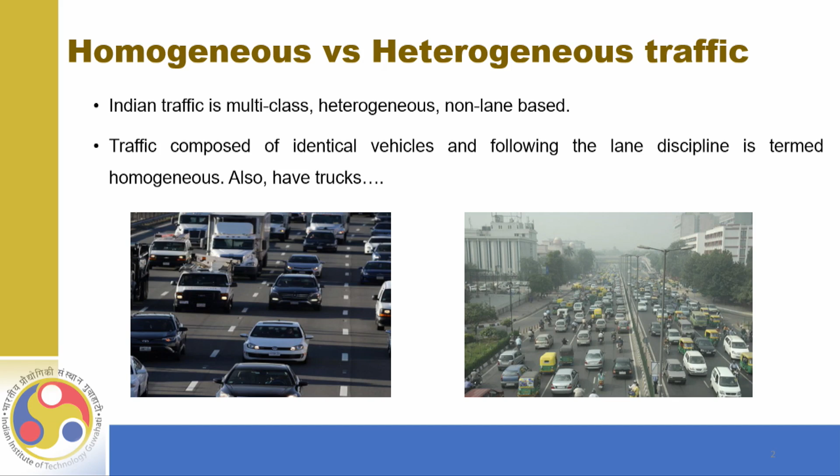Along with that, the capability of vehicles is different. Some vehicles can travel at maybe 100 kilometers per hour, while at the same time we have three-wheelers and other vehicles which move at 40 or 50. Nowadays electric e-rickshaws are also there, sharing the same space. So speeds are different along with different maneuverability.

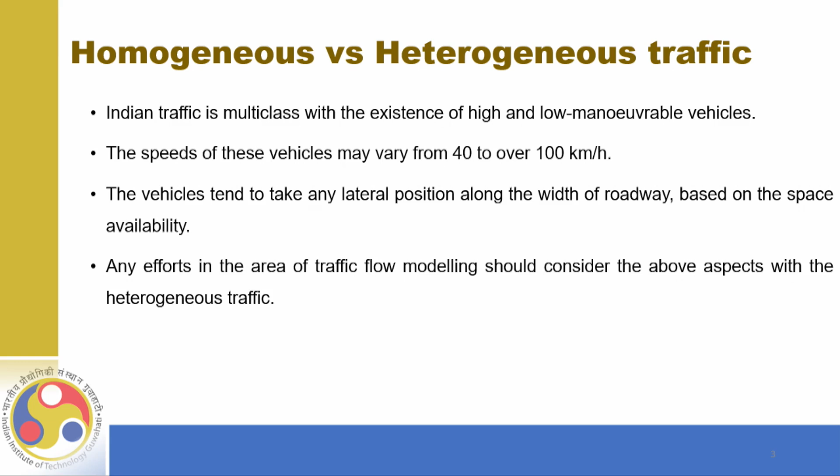We have two-wheelers which can basically weave through whatever available spaces are there, passing through those spaces, and the vehicles are not maintaining any lane discipline. Whatever space is available, that tries to be occupied by the vehicle. So if we are able to model the traffic for this condition, we need to have this aspect in our mind.

As discussed in our previous lecture, the parameters we measure are speed, flow and density. Out of these three parameters, flow and speed are direct measurements - we can easily measure them from the field. However, density is usually measured from the fundamental relationship, that is Q equal to K times V.

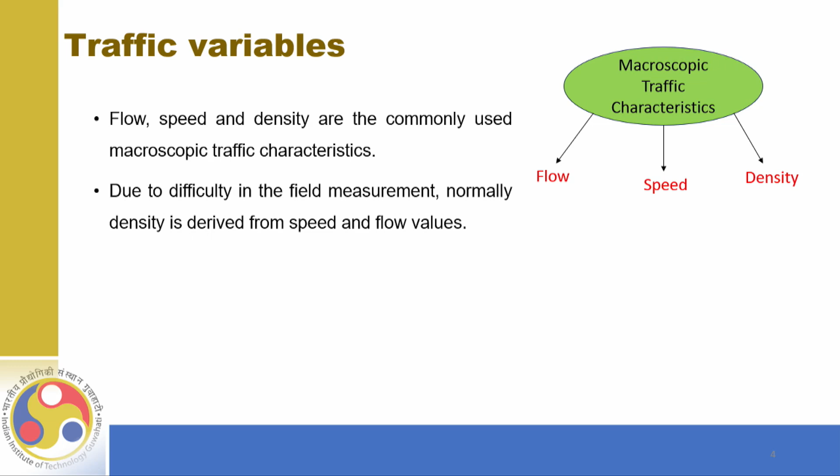Density is usually expressed as the number of vehicles existing per, in developed countries where lane discipline is maintained, vehicles per kilometer per lane. But if we are considering Indian conditions, we are not maintaining the number of lanes - lane discipline is not there.

In that condition, what we can do is measure it in terms of the number of vehicles that exist per kilometer per direction. So rather than considering density per lane, we consider it direction-wise. For a direction, we calculate the number of vehicles that exist, and express how many vehicles exist per kilometer.

Although it solves one issue by considering lane discipline, there are some other issues also there - it is not considering the dimensions of different vehicles. Here in India, we have very small two-wheelers, along with large vehicles like trucks sharing the same space. So although the directional measure resolves the issue of non-discipline nature, we are not actually accounting for the different sizes of vehicles.

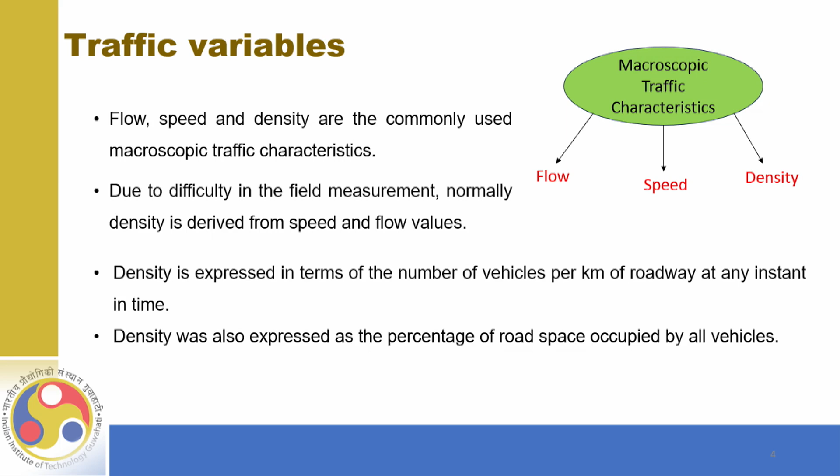Along with that, different vehicles can maintain different speeds. We cannot expect that three-wheelers will go in the same manner as a car or a truck can go. So the speed difference among different classes of vehicles, along with size, is not considered in this manner.

So to resolve this, there is a need of understanding this traffic density or concentration by some other means. For that, one concept is occupancy. By definition, occupancy is the proportion of time during which a single point of roadway space is covered by vehicles.

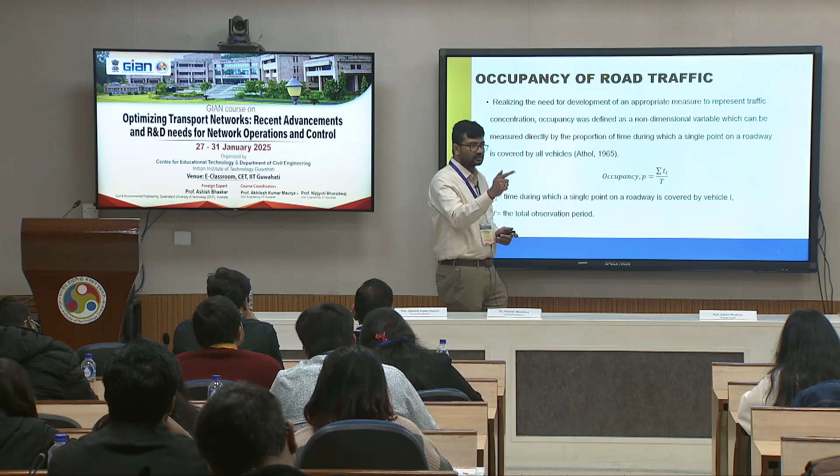If you look into the equation, occupancy along the line - that means in the cross section of road - is measured as the summation of Ti, that is the time for which all vehicles occupy that particular line, divided by capital T, that is the observation period. This observation period might be 5 minutes or 15 minutes depending upon our study.

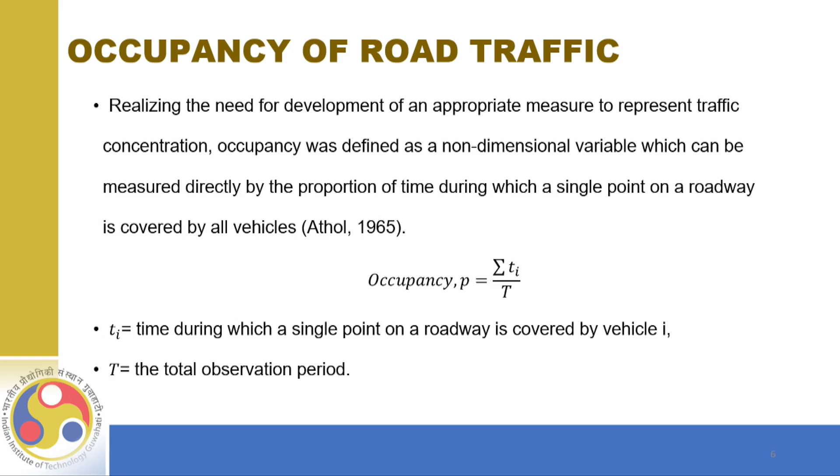Small t is the accumulation - let's say we have observed 10 vehicles, then those 10 vehicles occupied that particular segment for a certain time period. That time period can be observed as the summation of small t. Now with area occupancy, out of this, we have two issues - one with speed and one with size.

Speed is definitely taken care of by this occupancy, because if the vehicles are slower in nature, it will occupy for more time. If it is a faster vehicle, it will occupy that particular space for a lesser duration. So occupancy is actually considering the speed of the nature.

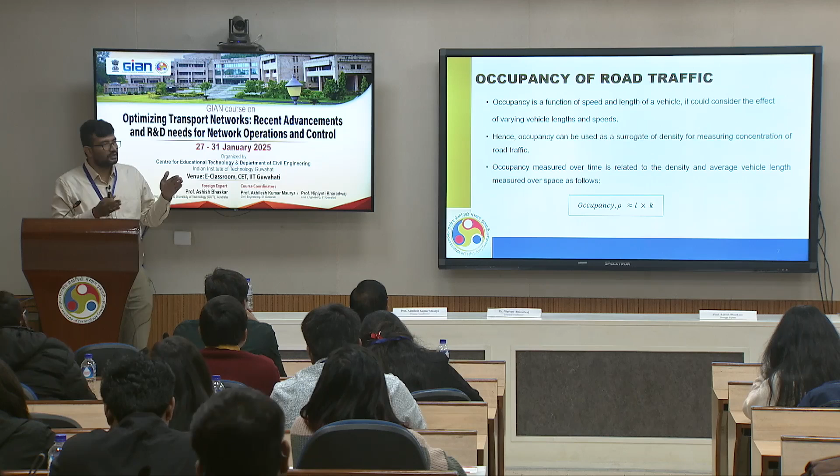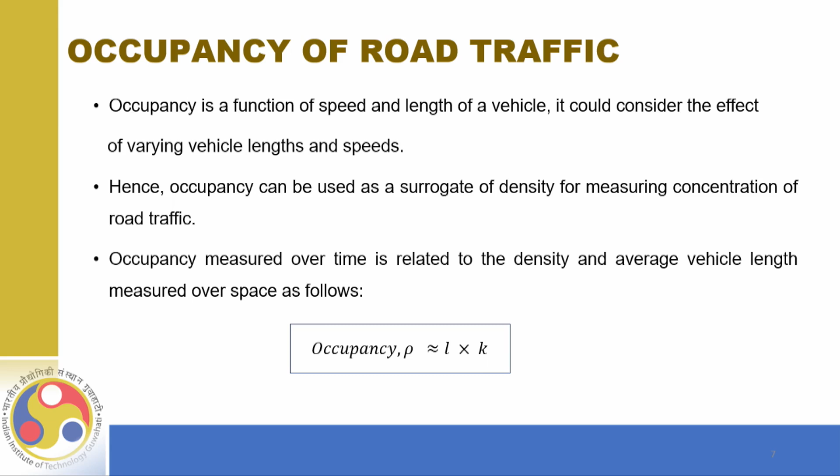However, along with the speed, in Indian context vehicle sizes are also different. A slower vehicle with larger size moving, and a small vehicle with slower speed moving, that is accounted for in this occupancy. So if we look into this occupancy, it is also having a relation with the density parameter. Occupancy is proportional to the average length of vehicle and the density.

Now, if we measure occupancy in real life, in practice it is difficult to measure the occupancy for a particular line, so rather we measure it for a small segment. Rather than measuring it on a line, we consider a small segment of 5 or 10 meters, and along that line we can consider it as a detection zone. In that detection zone, we measure it for a duration of time T, which might be 5 or 10 minutes, and in that duration we see how much time these vehicles take to navigate this 5 or 10 meter detection zone. That time comes as the summation of small Ti.

So now one thing is known: this occupancy, when measured for a small detection zone, also depends on the length of the detection. If the detection length is small, the occupancy value will be different, and for a longer detection zone the value will be different. So for the same road segment, the occupancy value might be different depending upon the length of the detection zone.

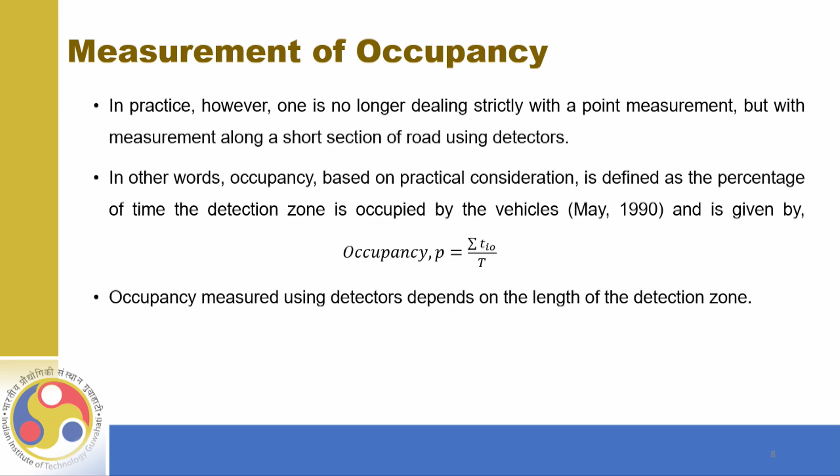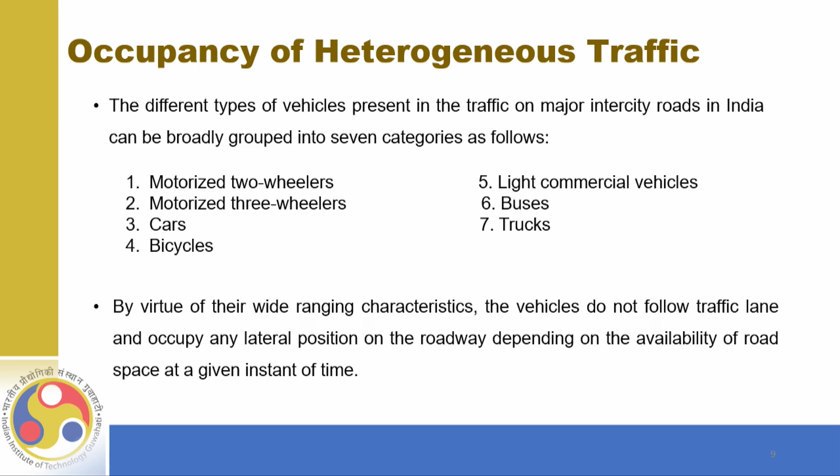Now for heterogeneous conditions, while measuring occupancy, we have around 7 different types of vehicles: motorized two-wheelers, motorized three-wheelers, cars, bicycles, light commercial vehicles like small pickup vans, and buses and trucks, all existing in the same roadway space. These vehicles have different static and dynamic characteristics, that is, their maneuverability is different and they can maintain different speeds, so all these aspects need to be considered while estimating the occupancy.

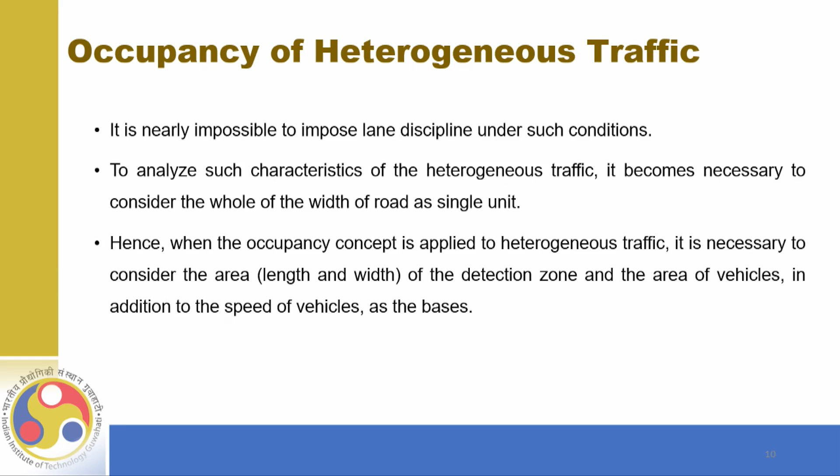To analyze such characteristics, it is necessary to consider the width of the road, and along with that, the length and width, that is the area of the vehicle, should also be incorporated. So if along with the travel time we also consider the area of the vehicle in the calculation, then all vehicles' dynamic characteristics, size, and speed will be incorporated in the estimation.

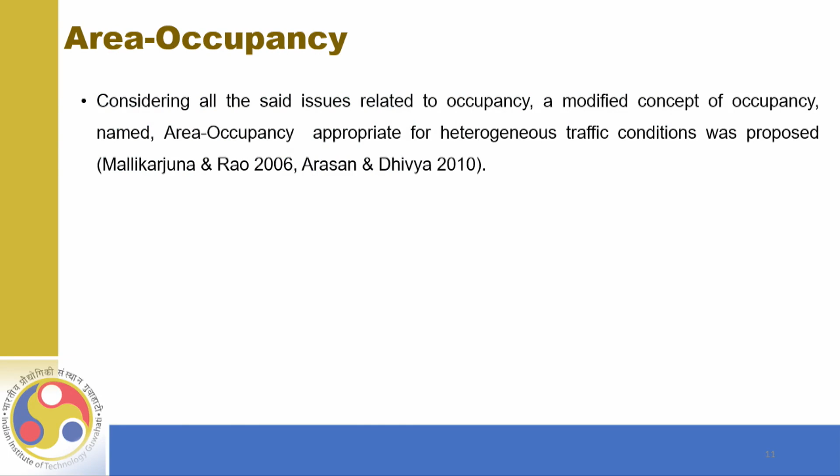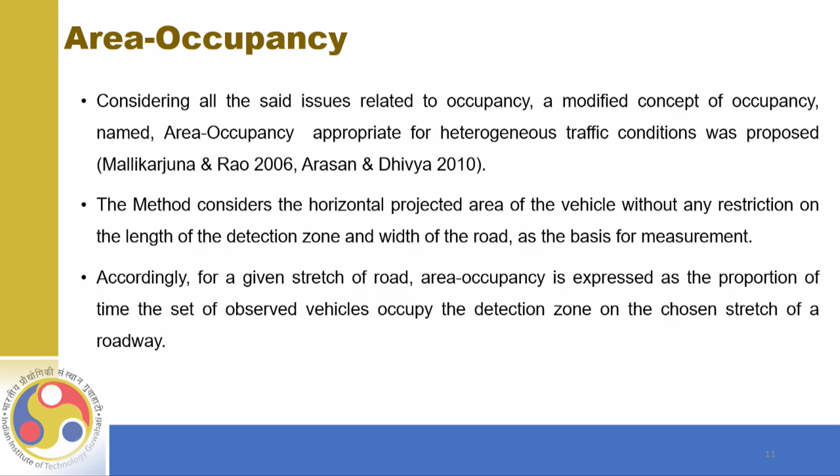For that, a slightly modified version of occupancy is proposed, called area occupancy. What area occupancy does is, along with the travel time of the vehicle, the horizontal projected area of the vehicle is also considered in the estimation. So for a given stretch of road, area occupancy is expressed as the proportion of time the set of observed vehicles occupy the detection zone for a chosen stretch of roadway.

Looking at the earlier definition, occupancy was the summation of Ti by capital T, that is the total observed time, and small Ti is the detection time occupied by the vehicle. Now if we introduce capital A, the area of the detection zone (length and width), along with the area of individual vehicles added into the occupancy, it becomes area occupancy. Along with the speed, it also characterizes the size of the vehicle, so small ai is the area of the vehicle being considered. If larger vehicles are there, the occupancy value will go up. So along with speed, the area is also considered in the calculation.

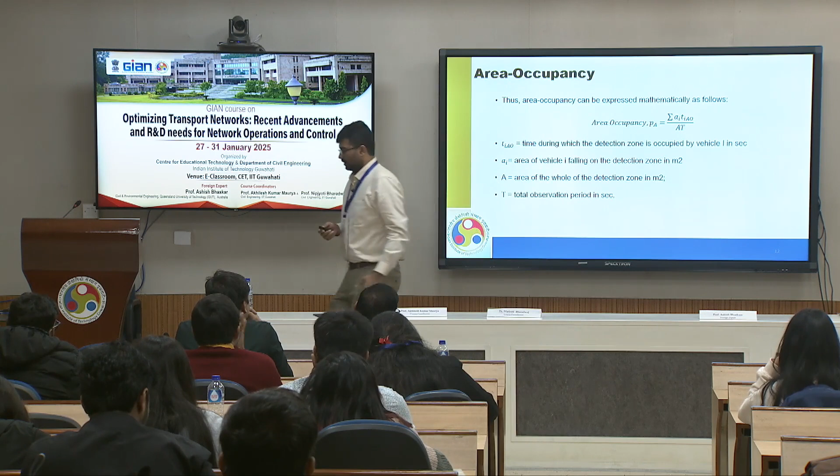Speed will be factored with small Ti, the time spent in the particular detection zone, say 5 or 10 meters. If the vehicles are moving faster, they will be there for lesser time. So speed is accounted for by that, and area is also accounted for here.

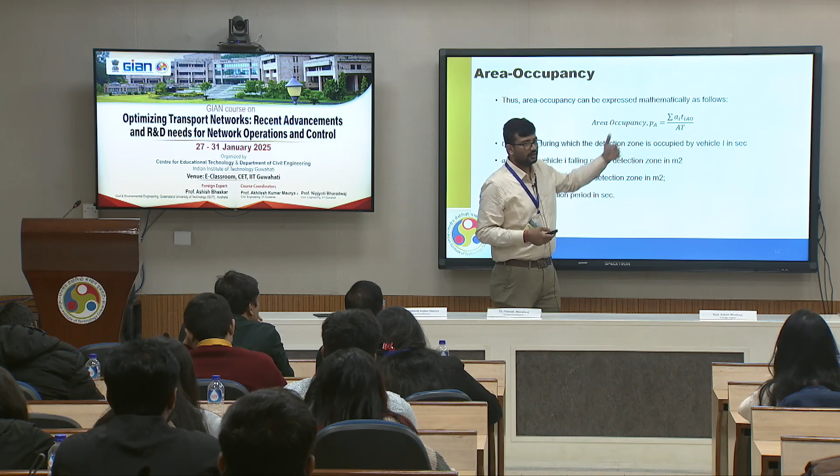Now, what are the advantages of using this concept? Area occupancy is not affected by the length of the detection zone. Earlier, the problem was that if the length of the detection zone is different, the occupancy value will be different. So that will be taken care of by this method.

The other advantage is the effect of heterogeneity and lane discipline is also incorporated here, as we are considering the entire width of the road. So it is an indicator of roadway traffic concentration for any flow level, because of its ability to accurately replicate the extent of use of the road. If it is used by different classes of vehicles, how different classes are using it is also incorporated here.

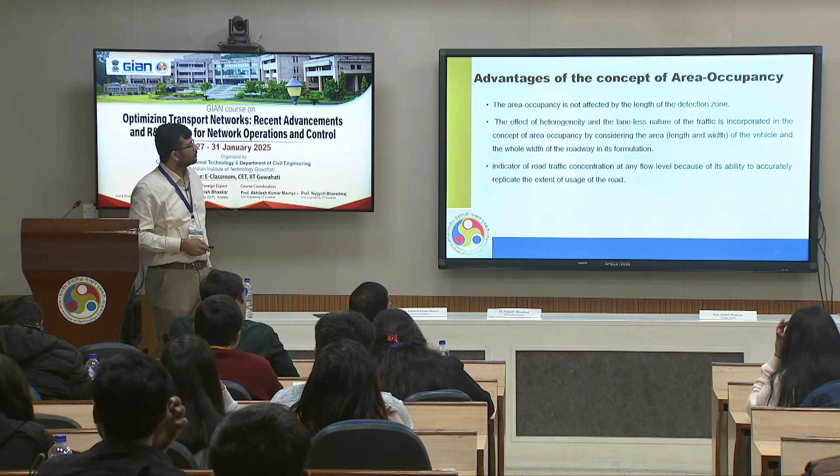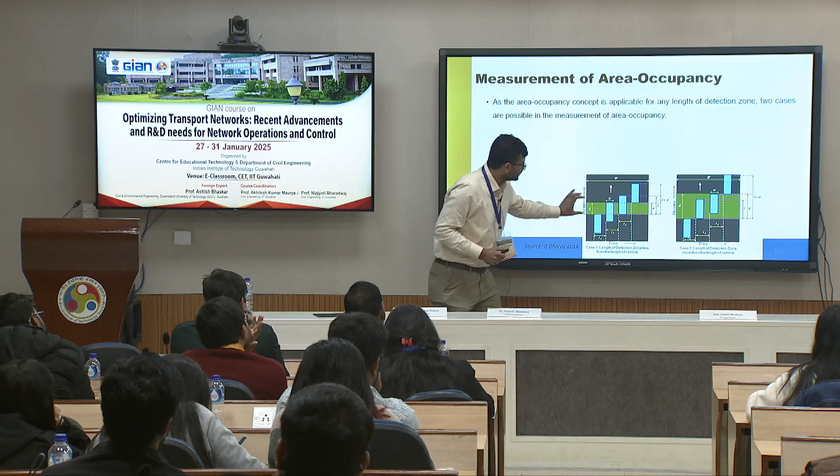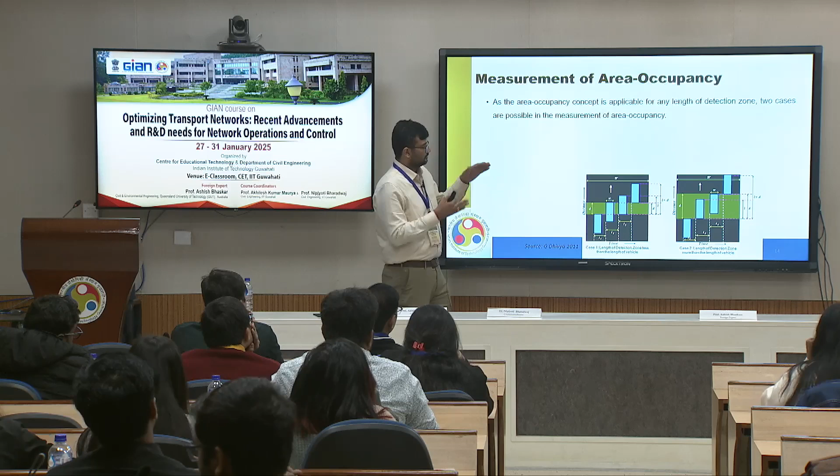Now we will go a little bit into how it is measured in the field. There are two cases. In measuring the area occupancy, the detection area is not a concern, so we consider two cases. The first case is when the detection length is less than the length of the vehicle. Case 2 is when the detection length is longer than the length of the vehicle.

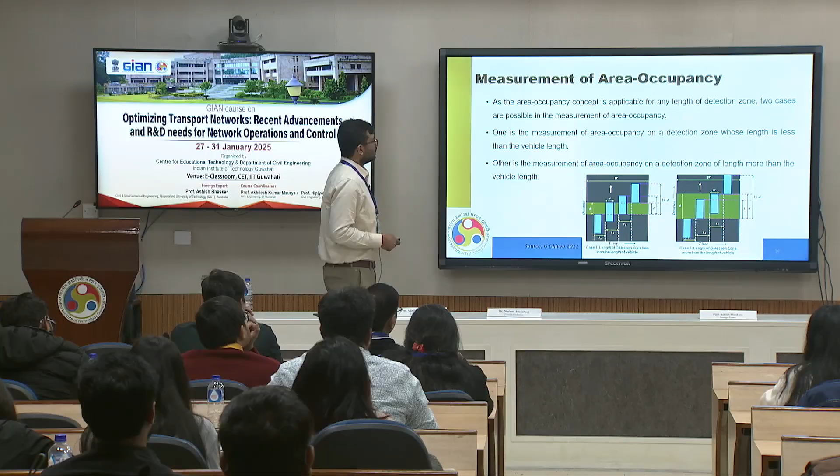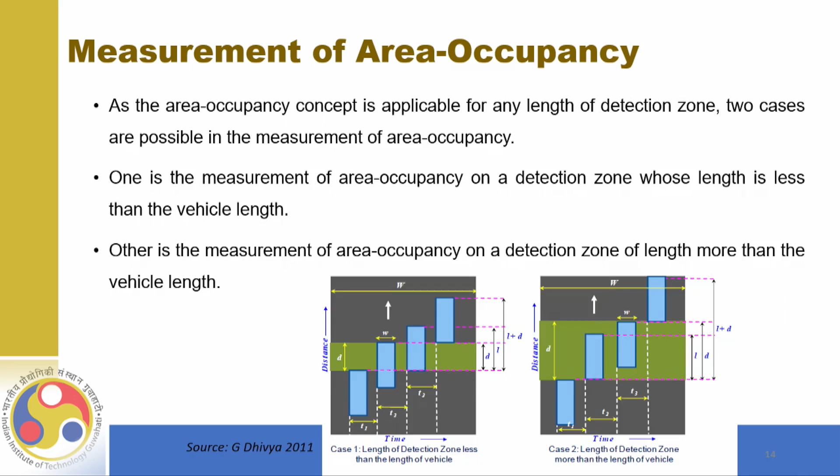Now, looking into the measurements, the time we discuss here can be divided into three components. The first component is the time taken for the projected area of the vehicle to fully cover the detection zone. In the first case, once the vehicle reaches the detection zone, time T1 is the time till this vehicle covers the detection zone. Here, the length of the detection zone is less than the vehicle length, so the vehicle is partially covering the zone.

Similarly, for case 2, during this T1 time, once the vehicle reaches the beginning of the detection zone, it fully enters into the detection zone. That is the T1 time component. The time T2 is the period after T1, during which the horizontal projected area of the vehicle on the detection zone remains unchanged, from the time it is fully covered until the vehicle's rear end reaches the beginning of the detection zone.

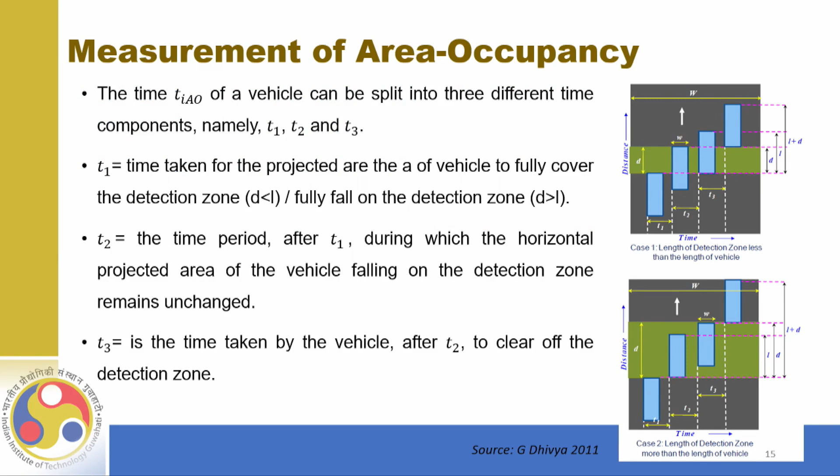So the area remains the same during this time period. Once the vehicle is fully covered, it moves towards the end of the detection zone, that is T2. Then T3 is the time taken by the vehicle after T2 to clear off from the detection zone. So these three time components can be observed.

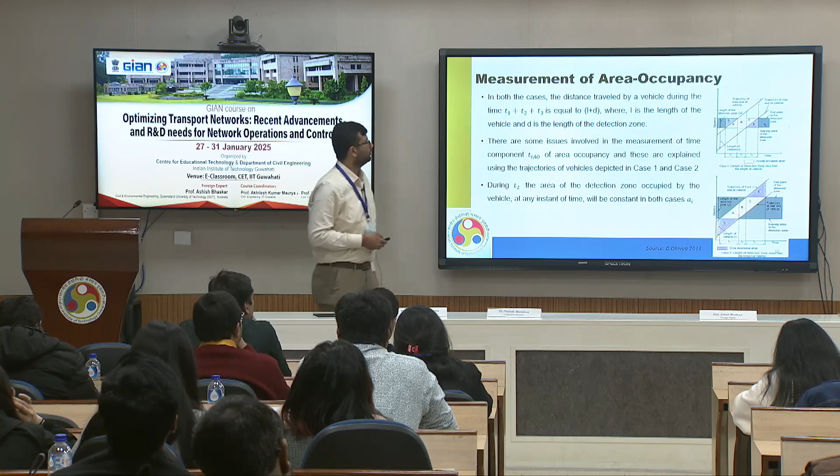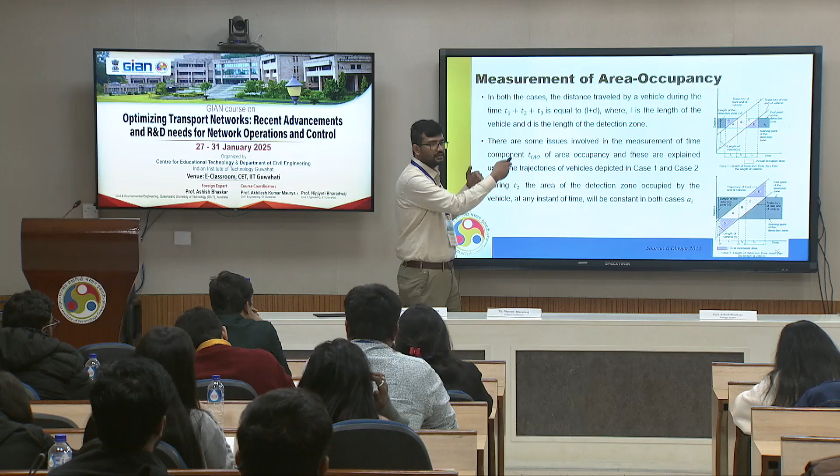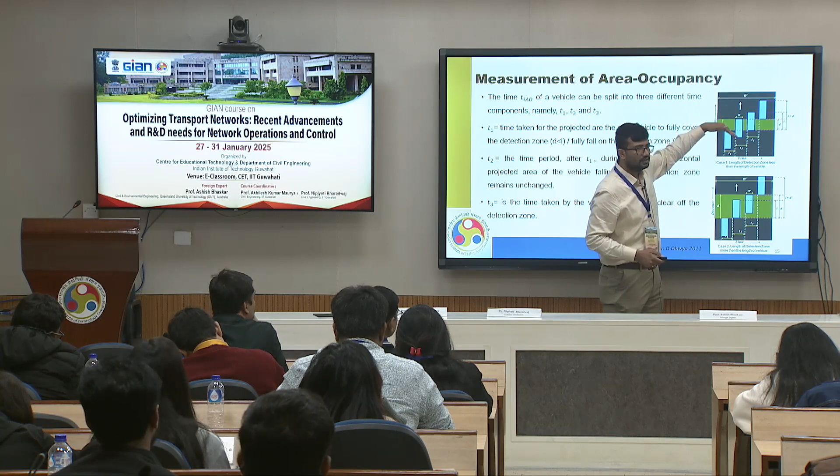Now, while measuring this area occupancy, we can see that in both cases the distance traveled by the vehicle is equal to L plus D. During this time, the actual distance traveled is the length of the vehicle plus the length of the detection zone. Once the vehicle enters, it covers the length of the detection zone, and once it exits, it also covers the length of the vehicle itself. So in both cases, the distance of the detection zone plus the length of the vehicle is covered during T1, T2 and T3 time.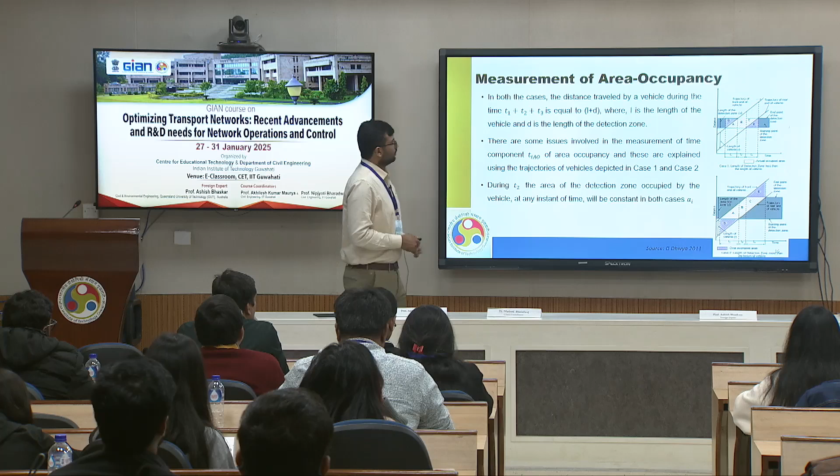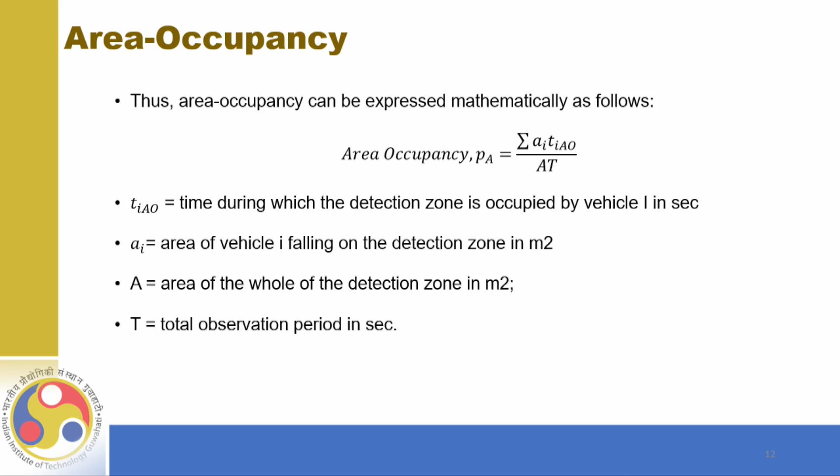Now, while doing the measurement for area occupancy, there are certain overestimations. What is happening is, if you look into this definition of area occupancy, this A-I is the area of the vehicle.

So here is the time-space diagram of one vehicle that is plotted. In this time-space diagram, this line is the front end of the front bumper of the vehicle, and this one is the rear bumper. We are not considering two vehicles, just one vehicle, to show how overestimation is happening here. So this is the front bumper, this is the rear bumper, and the vehicle passes through that particular segment.

What is happening, if you look into the equation of area occupancy, is that the area mentioned there is taken as constant, right? The area should be constant. But here, the area is constant only during T2 time, that is the time where area remains unchanged. For the first case, the area will be the width of the vehicle into the length of the detection zone, because the detection zone is lesser than the length of the vehicle. In the second case, the unchanged area will be width of the vehicle into the length of the vehicle, because the detection zone is longer than the vehicle.

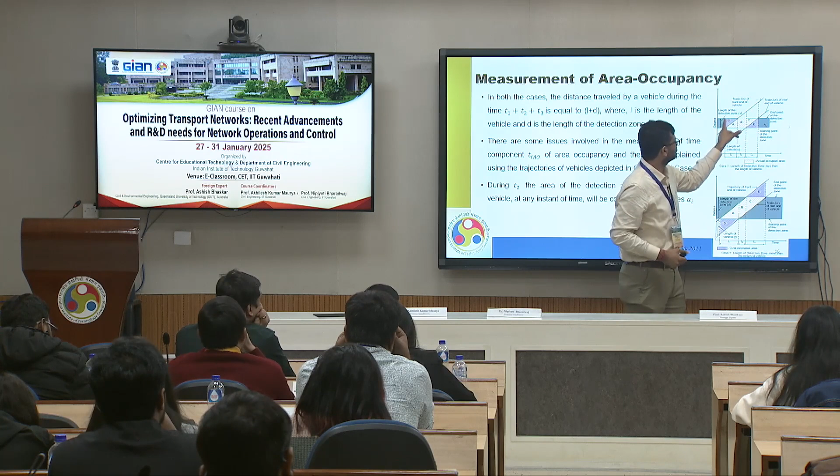Similarly, in similar fashion we can do for both cases. The actual occupancy here is this shaded area, which is a combination of A plus B plus C. If you consider the entire area, that is T1, T2, T3, then it will include this overestimated D and E area.

Similarly, in the second case, the desired area is A, B and C, but if you consider the entire T1, T2, T3 component, it will include this D and E area also.

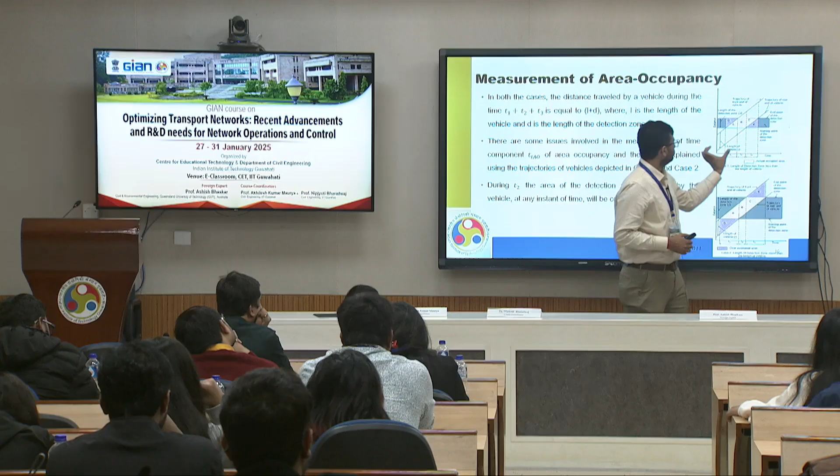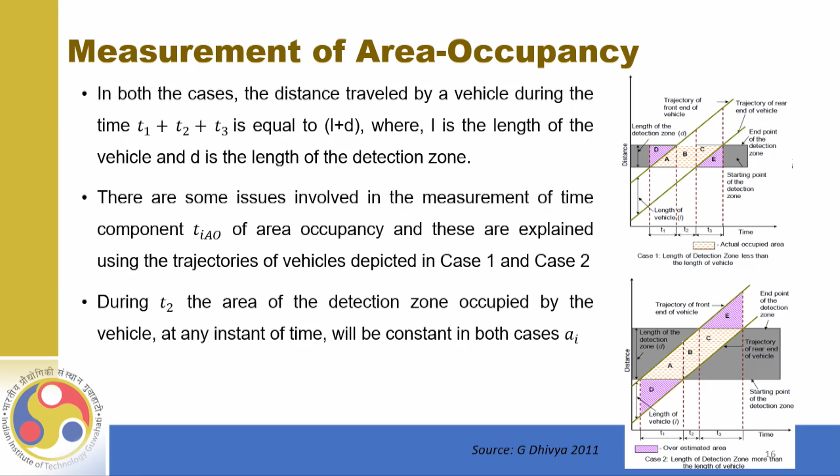So to reduce this overestimation, we can consider T1 and T2. If we let go of this portion, we can see that C and D are of similar area. So A, B, C is equal to A, B, D, or B, C, E. By considering these two components, the estimation will be better.

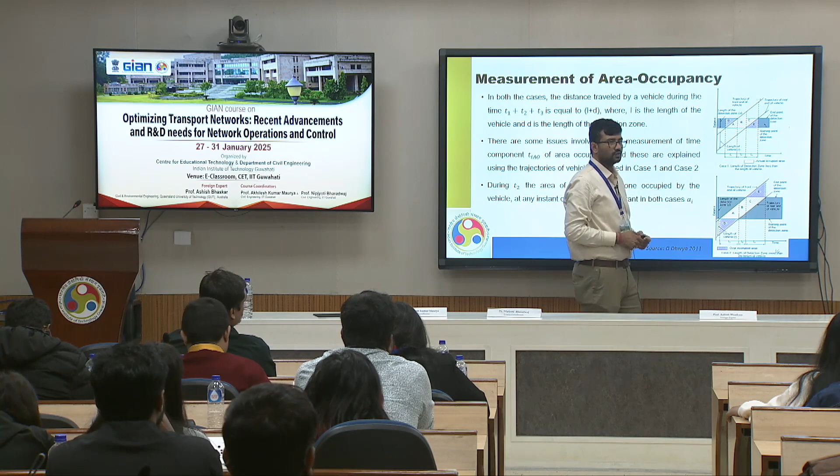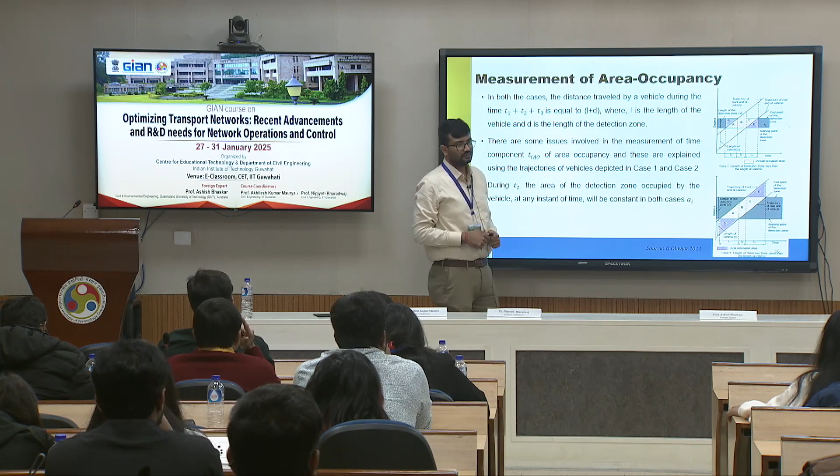A similar thing can be done in case 2 as well. By considering T1 and T2, or T2 and T3, we can remove the overestimation from the area occupancy concept. Now if we see the relation, I will not go into the derivation of this one.

If you see the relationship between density and area occupancy that is derived, you can see that density and area occupancy is proportionally related, and this relationship is observed the same for both case 1 and case 2 — when the detection zone is lesser than the width or length of the vehicle, and when the detection zone is more than the width of the vehicle. So one good thing with area occupancy is it is not changing because of the detection length.

So that's how we can see. From this we can infer that area occupancy can actually be a viable surrogate of density measurement, and it incorporates the true heterogeneous nature of Indian traffic conditions. So with that, I think I am done with this one.

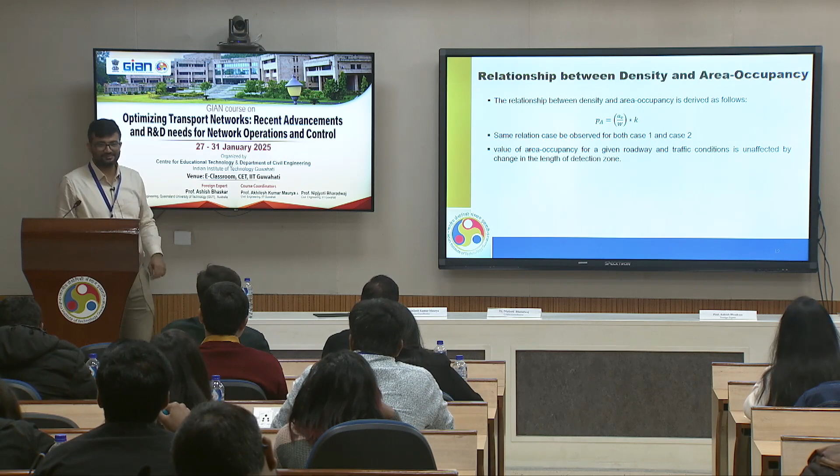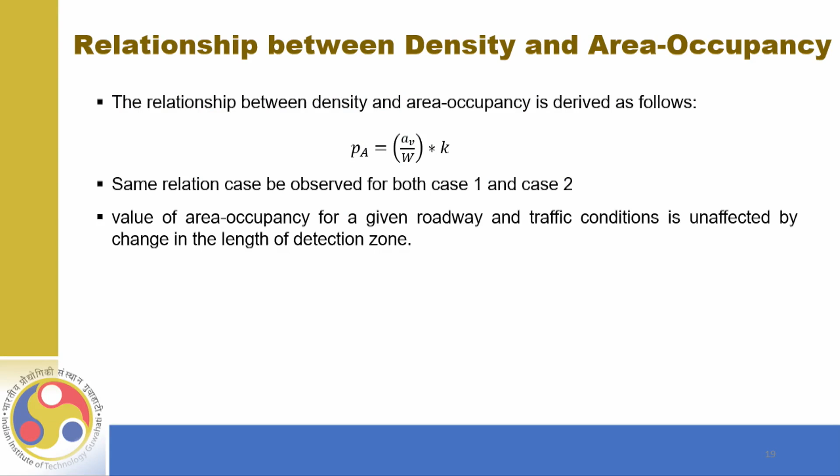If you wanted to take some more minutes, you can. What time are we having lunch? We can break. Yes, yes, yeah, yeah. You can switch on your mic and then ask — even online people will be able to hear if you switch on your mic.

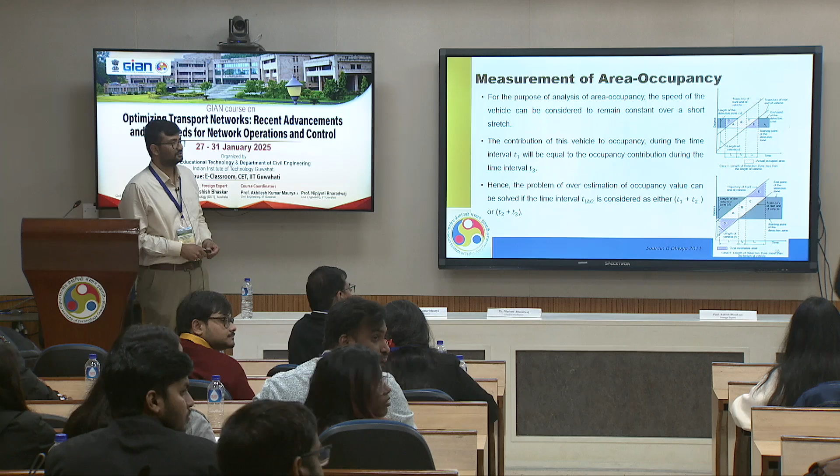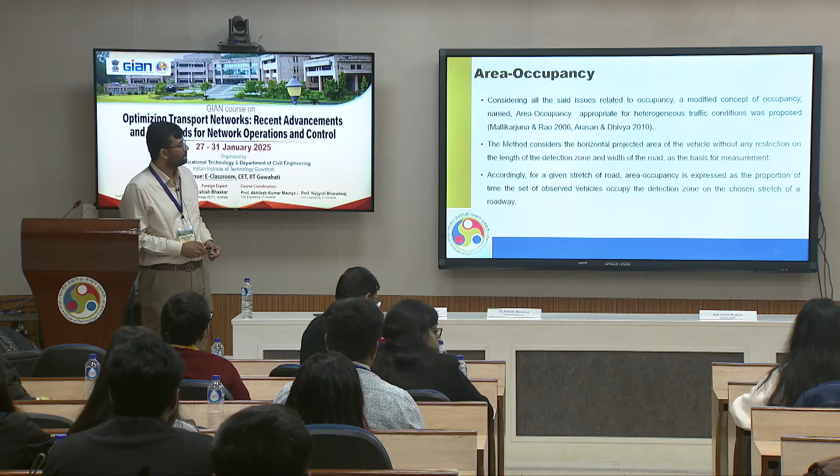One more question. There were two different time slots, two cases, one where the vehicle covers the entire zone. Having two cases, two variability — why don't we just make that time-space big so that we remove case one and get into case two, making the area very big?

The idea behind showing these two cases is to show that it is regardless of the detection zone. As we discussed earlier, the occupancy concept's value will be different for different detection zones. If your detection is too small or too big on the same roadway, it will give you a different occupancy value. But in both cases here, that thing is taken care of.

Why do we make, for example, this lesser than one meter? There might be multiple things here. One is with the sensors — loop detector is one thing that is used in many cases. If you measure by loop detector, your width is mostly lesser than this. Whereas if you measure occupancy with a camera, you can have a bigger detection zone. So depending on the nature of the instrument or data collection, we can choose a different type of detection zone and set things accordingly.

Okay, yeah. Excuse me sir, yes yes. Sir, would you like to throw some light on loop detectors which you just mentioned? Loop detector — I think Ashish sir will give better coverage on this. We will talk about it in a future lecture, and go into detail about that. Yeah, loop detectors and those things will be covered in detail.

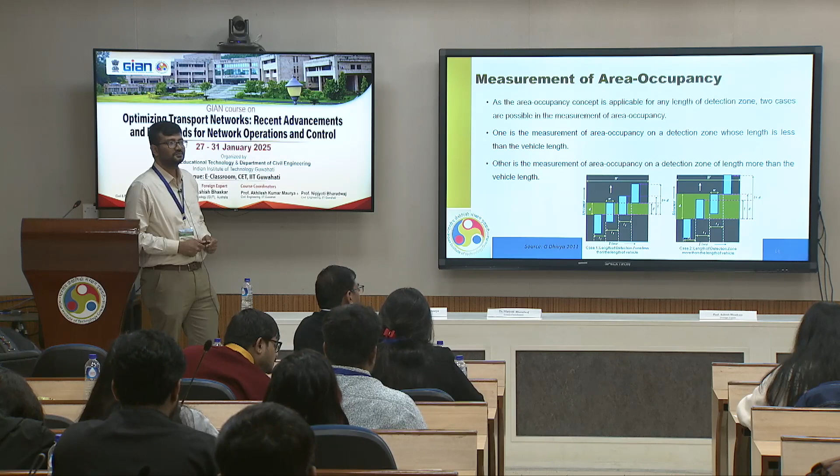So just be patient. Even if it doesn't get answered now, once the loop detector topic is covered, you can always raise the same question whatever your query is. Sure sir, thank you. From online participants, any other questions? Just unmute yourself or raise your hand so we can entertain your questions. Whenever you have a question, write in the chat box or raise your hand, we will figure it out. If no questions, then it's currently 1:10, so we'd like to start again at 2:15.